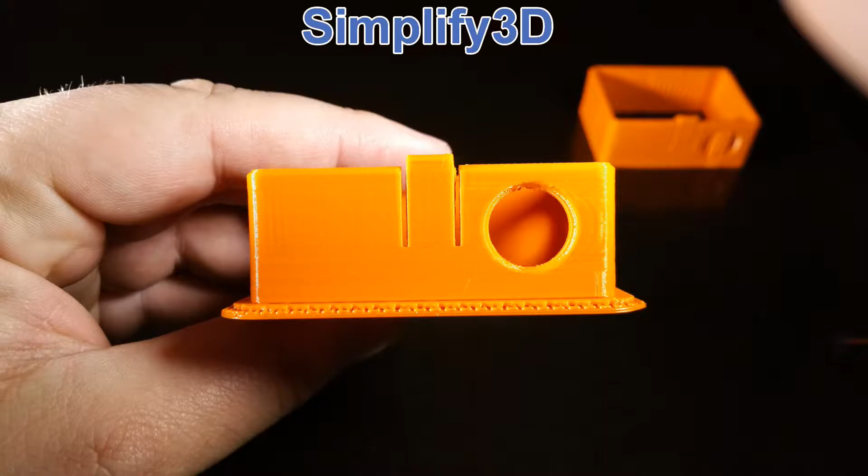The four comparisons we'll be making will be a time-lapse video between both slicers where you can see just how the same model is printed differently between the two. A dimensional quality test where we'll print a 20mm cube and measure in X and Y and see how close dimensionally we are to 20mm. Thirdly, a slicer performance test where we'll take a high polygon model, Yoda, off Thingiverse, slice it with each software, and see how long it takes to slice it. Then in the last test, we'll actually print that model with each slicer's settings and compare the quality differences between each model.

In the end, I feel like Simplify3D is the right software for me as a slicer software for my Makerbot Replicator 2X. You guys may have a different opinion when it's all said and done.

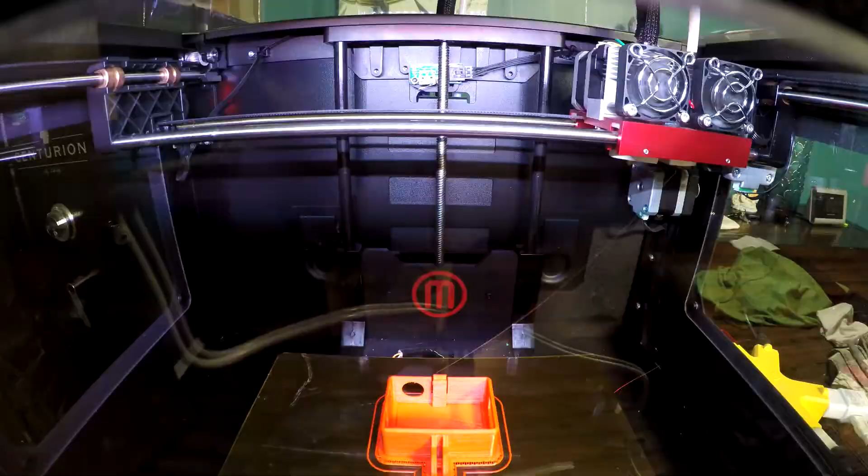Okay guys, this next test will show dimensional accuracy. We printed two 20mm cubes, one sliced with MakerBot Desktop software and one sliced with Simplify3D, both using the same settings as each other: a 5-wall thickness on shell, both with 50% infill, printed at 9mm per second, both with raft. We'll start with the MakerBot Desktop software.

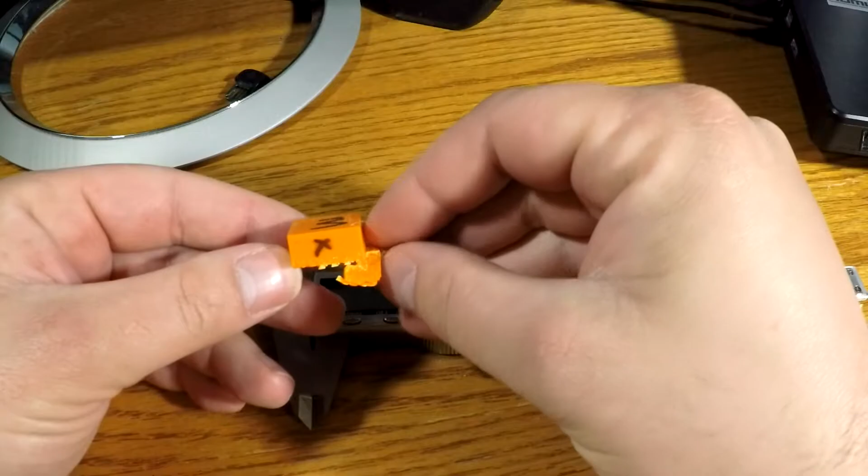Now, I designated an X for the X-axis on the side here. The M I drew was after I pulled it out, and it looks like a 3. It aggravates me because I should have done it a different way, but nevertheless.

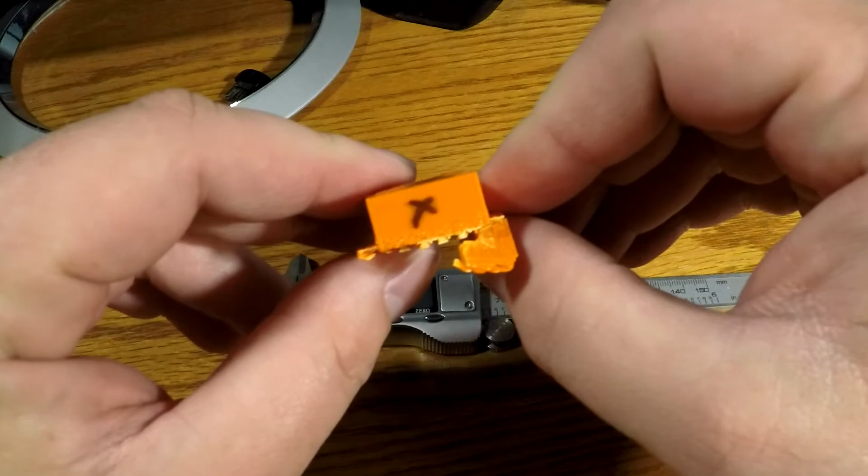Now let's just look at the quality of the print first. So first of all, the layer heights here look really nice. But down here at the bottom, the first say 20% of the print, it's got this rough texture going on that I can't explain why. Anytime I print something flat like this, with flat walls, the first 20% or so has this rough layer. And this is with the MakerBot Desktop software.

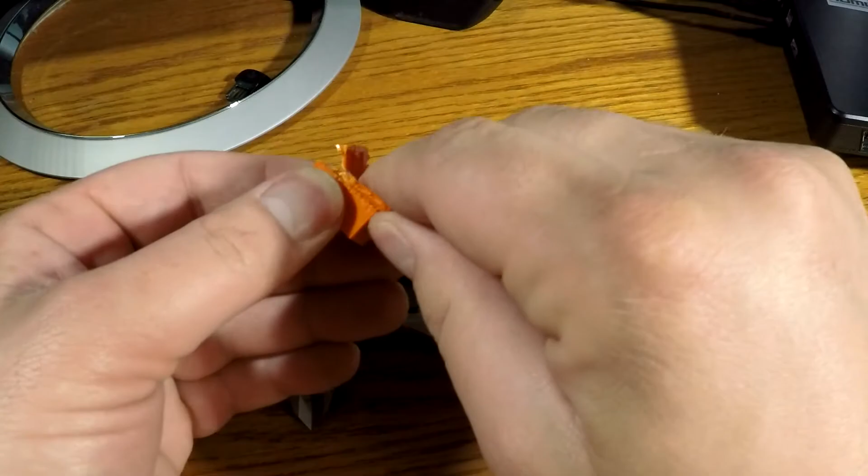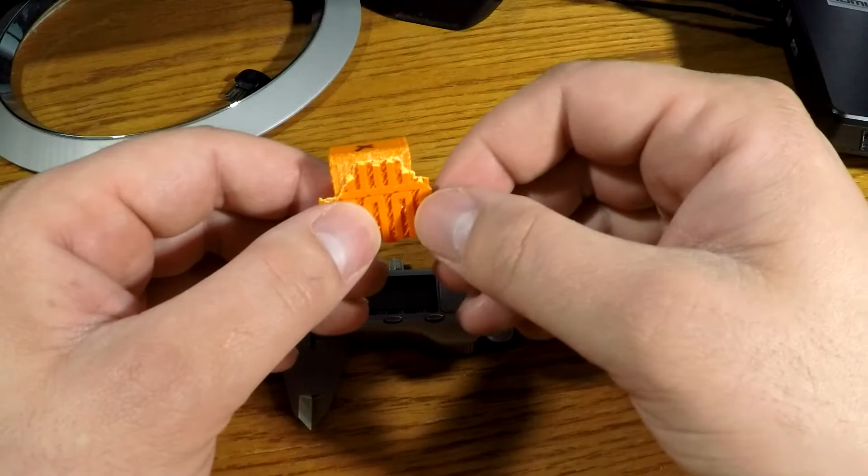Also, you'll notice the raft material is still attached, and the reason being is it's nearly impossible to remove, even though we used the same settings as Simplify3D. Now don't hold this against Makerbot, guys, because each software is going to determine things differently. To make this more effective at removal, I'd have to tweak the settings for this software individually, so don't hold that against it. This is more due to my laziness, not wanting to try to remove it. Again, this video isn't so much about the ability to remove raft material easily, it's about dimensional accuracy. So like I said, this is a 20mm cube.

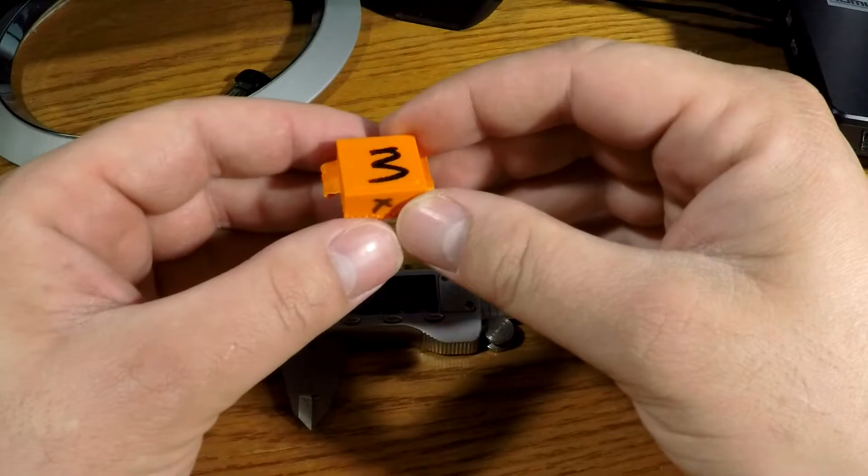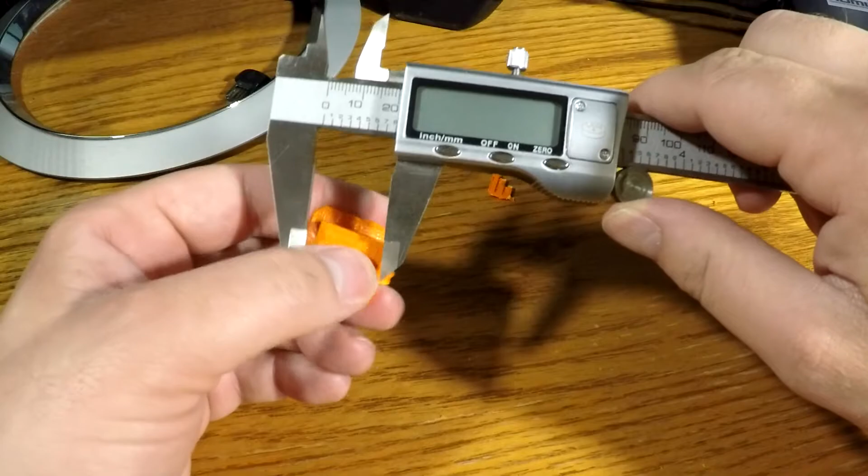Now be patient, my digital calipers were running low on battery, so I may have to hit the reset button several times. But we'll start with the X-axis of the print, and it's not bad, we get 20.02mm. Now we'll go ahead and do the Y-axis. On the Y-axis we get 20.11mm, so 0.11 millimeters over. I say anything 0.05 or less is acceptable, but we are over quite a bit on that one.

So now here's the Simplify3D model. We'll start with the X-axis. I'm sorry, X-axis this way.

Okay, 20.03, 20.02, not bad at all. Let's go to the Y-axis. And we are at 19.95. So it's actually a little smaller than the other model, but this is within what I would consider acceptable, within 0.05 millimeters plus or minus. So this is a pretty dimensionally accurate print.

For me, this is great when you start designing things that fit within each other. Now let's look at the quality of the print. I kind of jumped into measurement right away, got excited about that part, because really it's more about that for me than the surface quality, but both are very important.

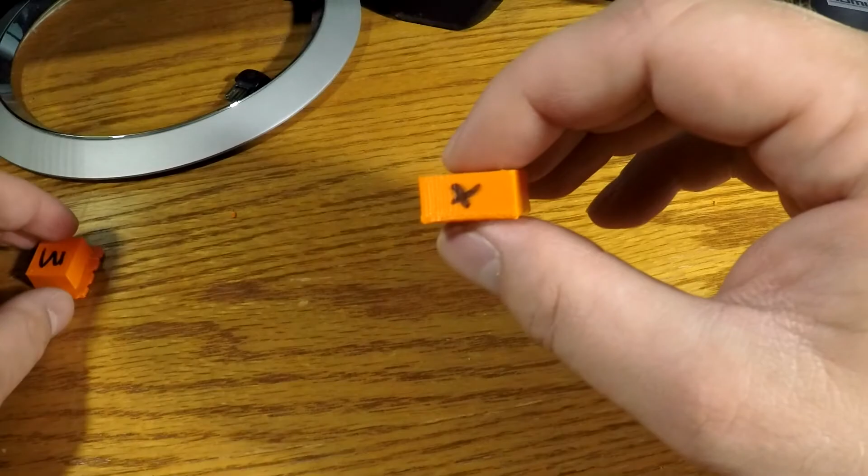So let's look at the surface quality of the print. As you can see, we don't have that rough section that we had on the MakerBot Desktop print. Let me put them side by side so you can compare.

Now the first layers are a little less consistent than the upper layers. I wouldn't say stringy, but they're not as tight together. That could be due to my settings for raft material, and we could tweak that to make it better. But overall, surface finish is better with the Simplify3D model, and the raft material removed fairly easily as well, with a 3-layer base height.

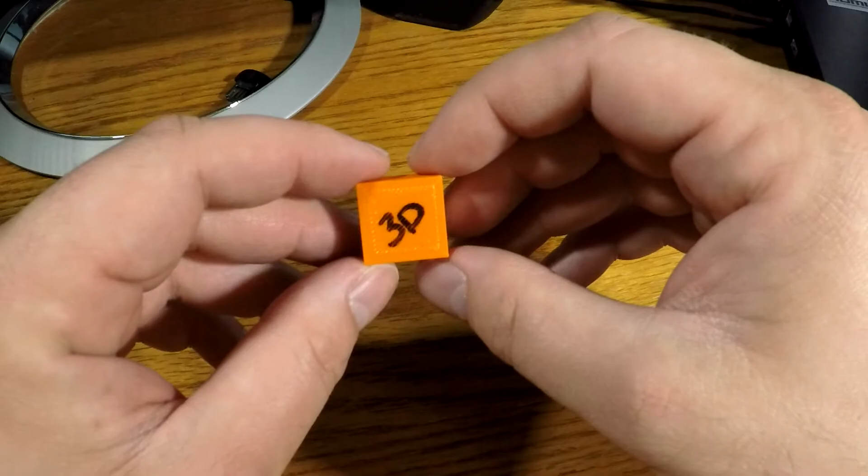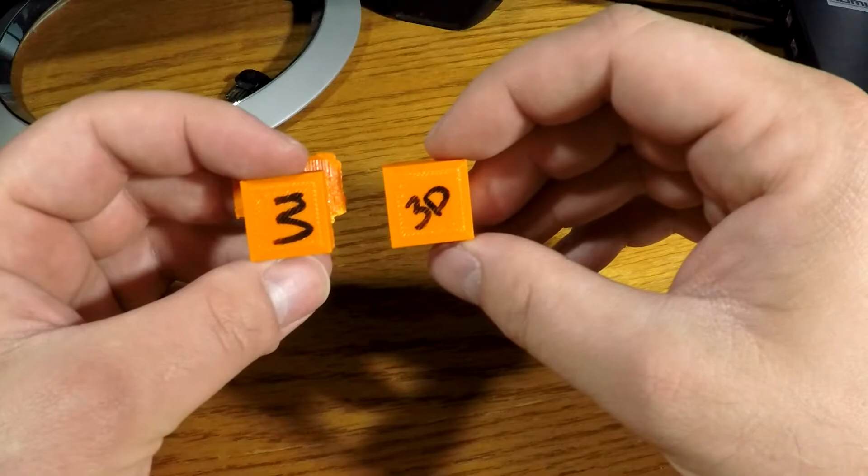So overall, guys, the Simplify3D print gave me a more accurate, dimensionally correct print, and this isn't compensated for in any software for backlash or shrinkage or anything. This is just a raw print, measuring it to see how close we are with each software.

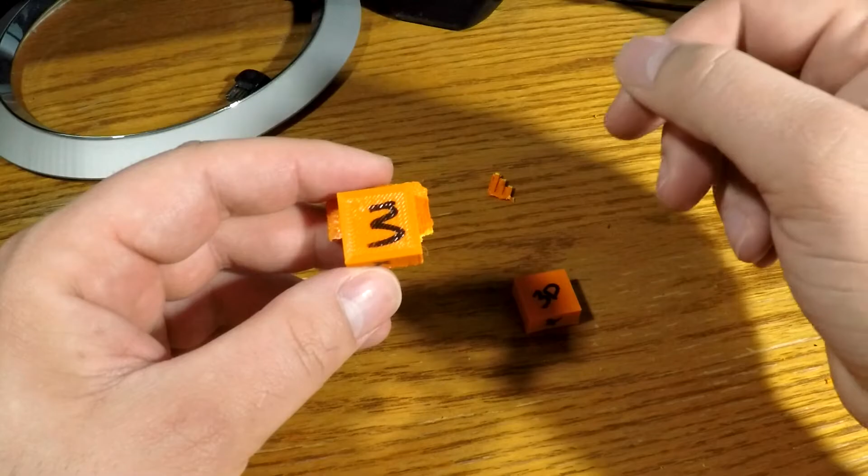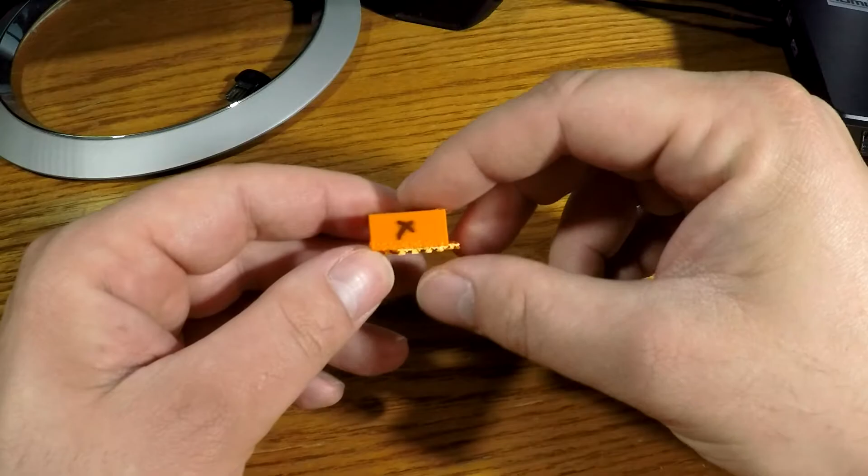Now, with that said, one reason I want to point this out is, as I may have mentioned earlier in the video, where this all started was with a GoPro case. The MakerBot Desktop software GoPro cases did not fit the factory GoPro accessories, and it added material between the parts where they hooked up. Bear with me, I wasn't going to show this right now, but I'll make a little racket.

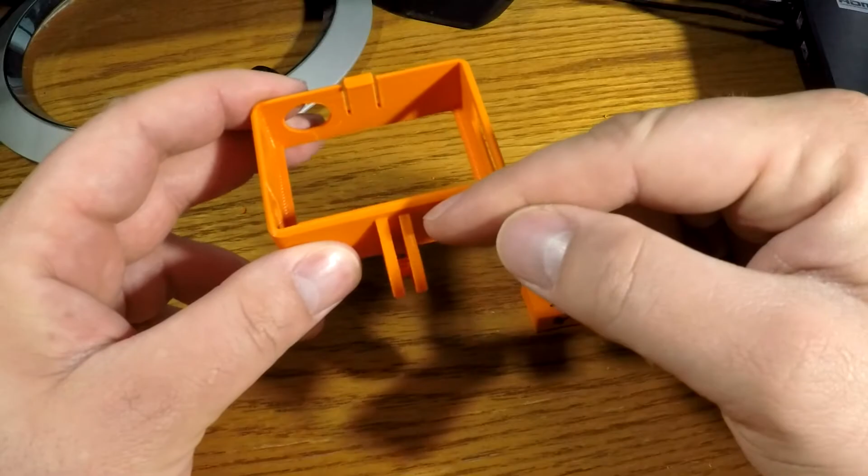I apologize, but this is another case I printed for my GoPro with the Simplify3D software. With the MakerBot Desktop software, it seemed to add material in this area and made these a little thicker, so when you went to slide it onto a GoPro factory accessory, it started making these two prongs split open and crack the plastic. Not sure why that is, but as you see, the quality from Simplify3D carries over into this print. Very happy with what we have here, guys.

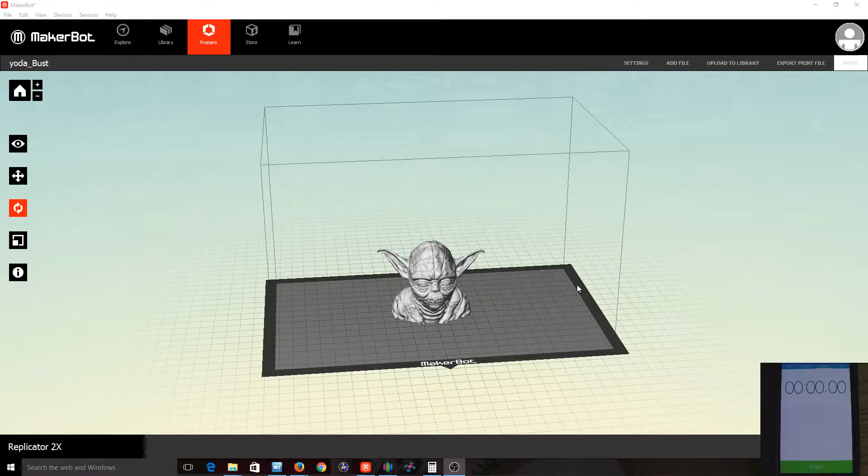Next, we'll look at the performance of the slicer software, slicing Yoda, and then we'll look at the print quality of each model. In this test, we'll show the performance differences between Simplify3D and the MakerBot Desktop software. We'll be printing Yoda, a high polygon 3D model, which will test slicing speed as well as support generation.

As far as settings go, we're using pretty similar settings between both softwares. Extrusion speed will be 90 millimeters per second. Infill will be 15%, and with the MakerBot Desktop software we'll use a hexagonal pattern. Model properties will be a 0.2 millimeter layer height with the number of shells set at 5. We'll be printing rafts with a base number of 3, and support material turned on with a support angle of 45 degrees.

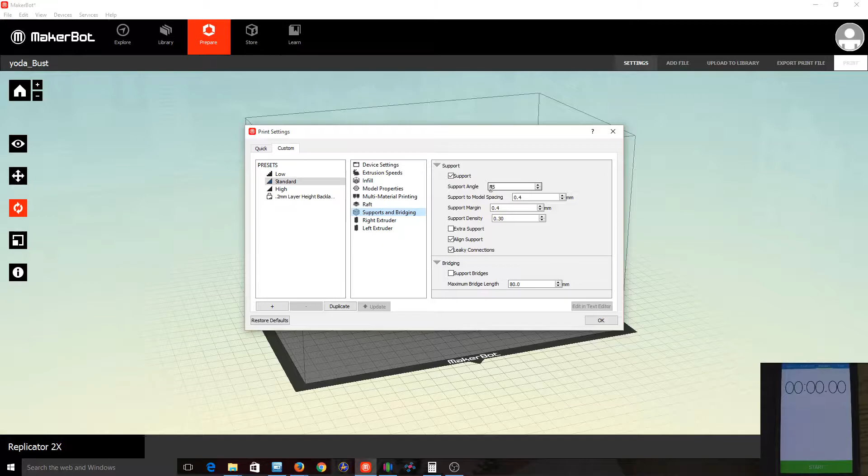Alright guys, here we'll hit the export print file button in the corner, and I'll start the timer on my phone, and we'll see how long it takes for the slicer to slice Yoda and get us to the next step of the process.

Okay guys, so it took about a minute and 1 second to export this file. The information shows the print time will be 4 hours and 8 minutes. The amount of filament used will be 51.37 grams. Resolution, as we talked about earlier, is 0.2 millimeter layer height, with rafts and supports both turned on.

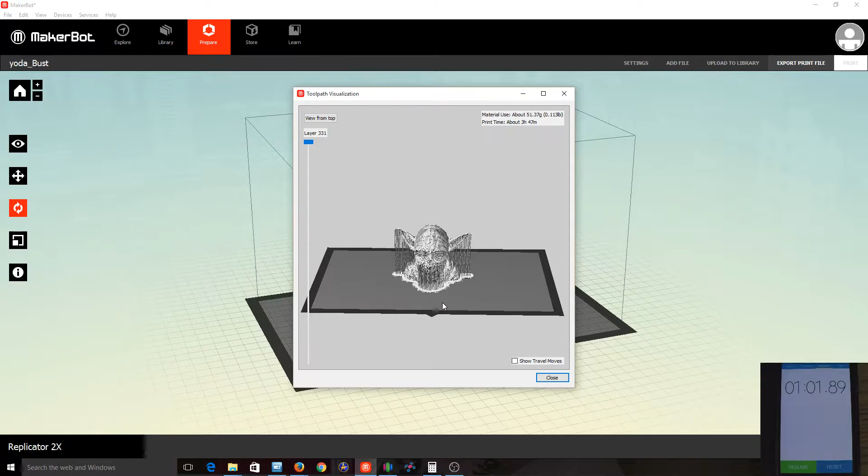You can hit print preview, and at this point you'll see where your support material will be laid. If you want to go down by layer, you can, and you can see the infill material, see when support material will be printed and where, and go all the way down to the raft itself if you wish.

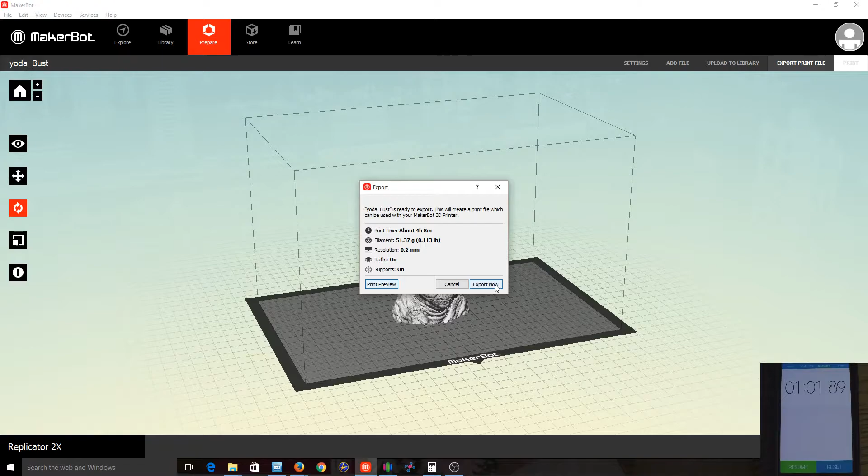Okay guys, now what comes next in the MakerBot Desktop software that is not in Simplify3D is you still have to export it. I'm not sure why they call it export print file here, and then you still have to export it down here. So let's hit export now, and we're going to save the Yoda bust on my computer so I can put it on my SD card and print it later. So we'll hit save, and we'll hit start there.

I'm a little behind. Okay guys, so it took a total of 3 minutes and 13 seconds for the MakerBot Desktop software to process the slicing files for Yoda, that's from beginning to end. Now that doesn't sound like a long time, but when you see what happens with Simplify3D, you'll see the difference.

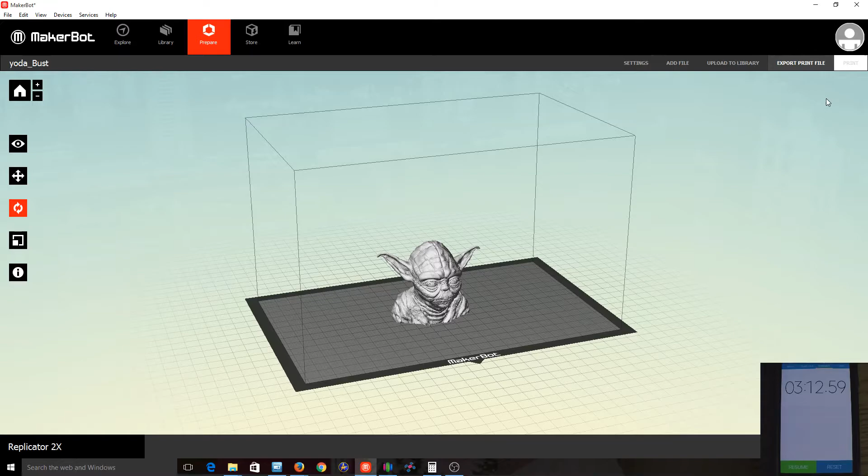Okay, here we are in Simplify3D, where I'm going to show you guys the performance differences and the speed you get out of this slicing software. This software is hands down phenomenal. I like it a lot. It's great. Though it costs you some money, it's worth it in my opinion if you guys be serious about 3D printing. So here we are with Yoda, same model as before.

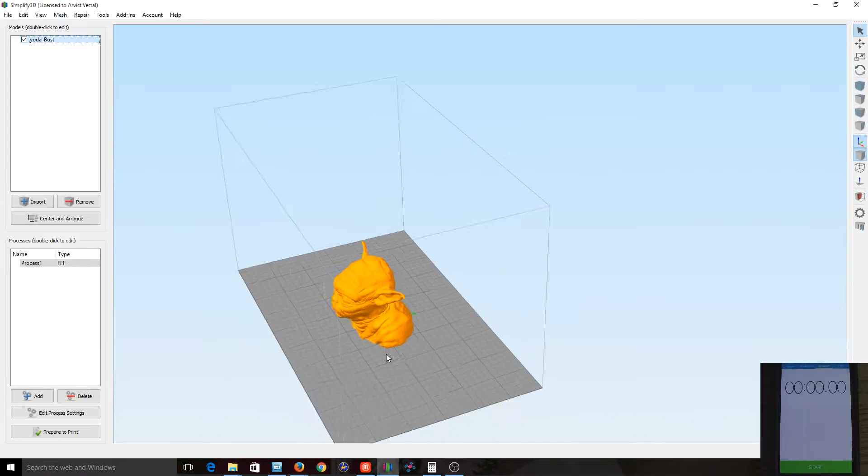As you notice, Yoda looks a lot better in this software. Less jagged, more smooth, more detail. He moves so much easier. Look how fast he moves. Wow, okay, so anyways,

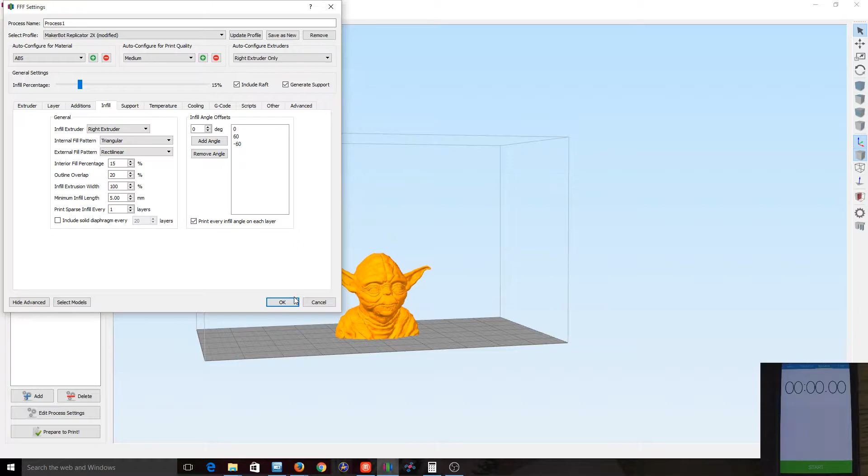let's go to our process, which is our settings. Our layer height is 0.2 millimeters, same as the last. Number of shells is 5. I know it's overkill, guys, but it's my print, so be happy. Infill percentage is 15%, and the infill pattern will be triangular, which is the only difference between the two prints. The MakerBot Desktop print was a hexagonal pattern. The raft material will be exactly the same, 3 layer base height.

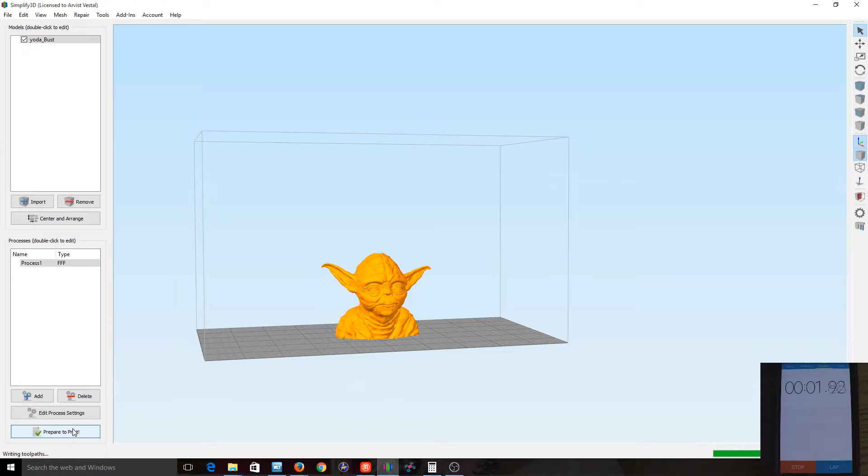We'll hit OK, and I'll come down here and hit the prepare to print button and hit the start button on my phone, and we'll see how fast this software really is in generating a file for Yoda. And go. Alright guys, you saw that. It was that fast, 7 seconds to generate the toolpaths, support material, and everything for Yoda.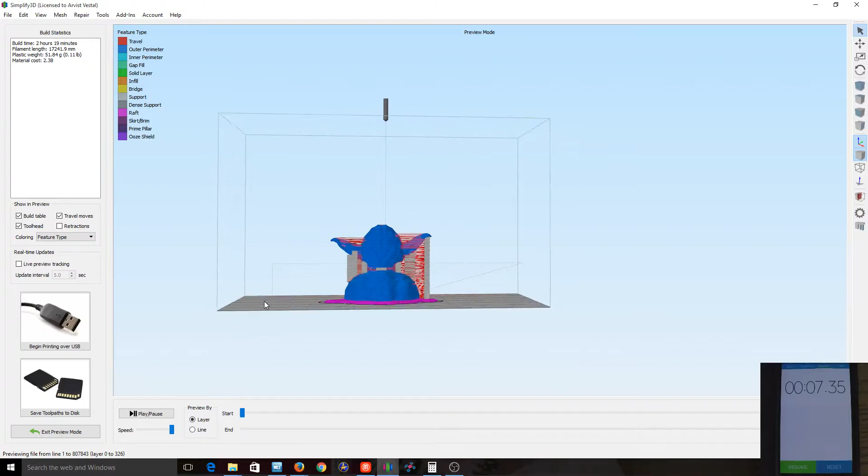So here we are with Yoda. Let's spin Yoda around. Now I'll say this one thing too, guys: Simplify3D has got their business in order when it comes to support material. Their support material cleans and breaks away so easy compared to the Makerbot support material.

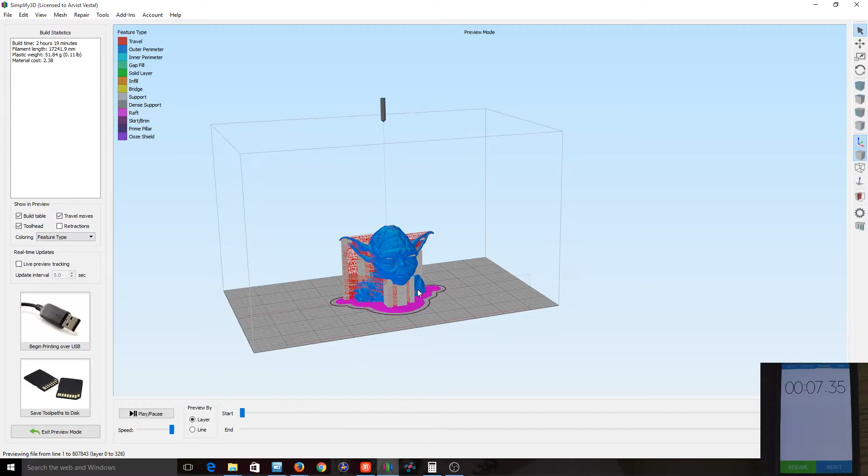Okay, so let's see here. Let's change this to... I'm sorry, we're on feature type. So the gray support material, the blue is the outer perimeter, the pink is the raft, and that darkish, blackish, dark navy blue, purplish line is the brim.

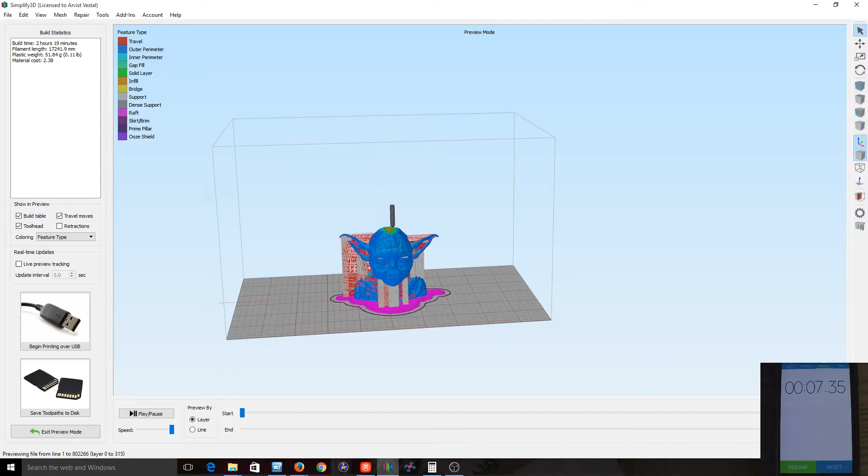So as we see, the print preview is a lot nicer too in Simplify3D than it is in Makerbot Desktop software. And as you go through the layers, you get a lot more detail, as you see the tool head moving around, and you can see the details in the infill. So I like this software a lot, guys.

So more or less you say, okay, now you gotta save your toolpath to a disk. And the answer is yes, or you print over USB, but we're gonna save it to a disk. So I hit the save toolpath to disk button, and literally I hit save, and that's it. We are done, guys. Simplify3D is that fast.

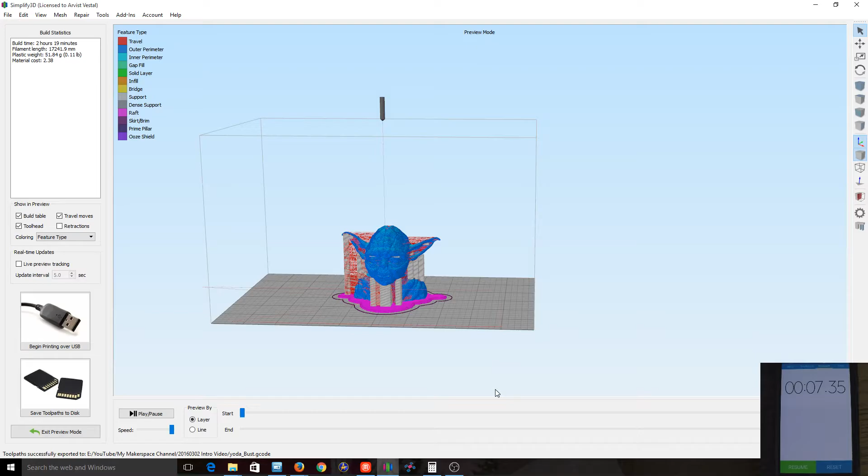So here we are. Simplify3D just did Yoda in 7 seconds, whereas Makerbot Desktop software took over 3 minutes to do the exact same thing. So 3 minutes don't sound like a long time, guys, but when you compare it to 7 seconds, it's a world apart. And hopefully here in a little bit, you guys will see the differences in print quality between Simplify3D and the Makerbot Desktop software with similar settings, with a similar model, on the exact same printer.

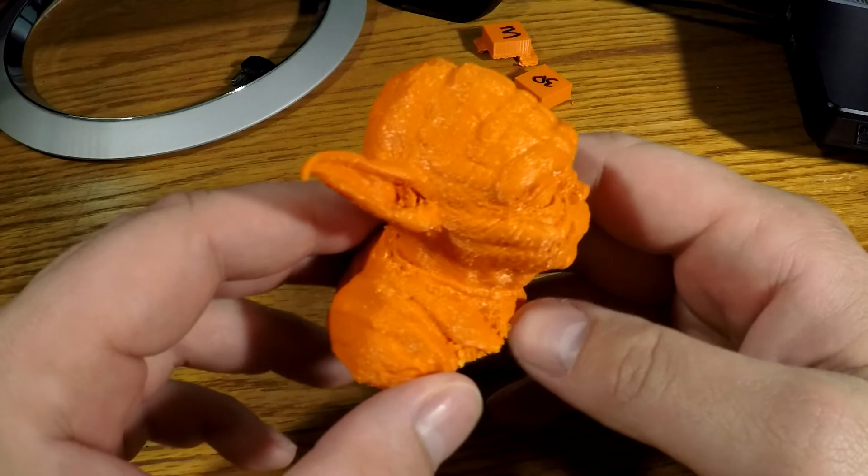Okay guys, let's wrap this up with these last 2 prints. These are the prints of Yoda that came off of the Makerbot software as well as the Simplify3D slicer software. We'll start with the Makerbot Desktop software first. Yoda. Here he is, guys. We'll go over overall quality of the model, and then we'll discuss the support material, and then we'll show you the Simplify3D model, discuss the same things, and then we'll wrap this up.

So as you can see, Yoda came out looking pretty good with the Makerbot Desktop software. I've never had a real big issue printing widgets or little statues, figurines, for that matter.

Overall, the quality is good. It definitely is good. We could have made it a little better, probably with optimization of the software, tweaking some settings and things of that manner. But for the sake of this test, we kept it very general and basic so that you guys can see the differences between the two with just basic settings.

So the first thing I noticed is the roughness of the model. Now a lot of this has to do with the amount of support material that Makerbot Desktop software said was needed for this model to print. It was a lot. He has support material on his neck, inside his eyes, inside his ears, underneath his ears, on both sides. And then on the back side here, it was all inside his neck cavity.

Alright guys, here's the Simplify3D Yoda, printed with the same settings as the Makerbot Desktop software Yoda. Again, this is a 0.2mm layer height. Immediately, one thing you should notice is this guy looks a lot more glossy. It's a lot shinier. It's actually a lot smoother to touch. You look at the detailing around the eyes and the cheekbone where the wrinkling is, and it's more pronounced in this print than it was with the Makerbot Desktop print.

And you notice there's a lot less support material on this print, and that's mainly due to the fact that the support material it printed with the Simplify3D software was a lot better. In fact, the picture I'm going to show you guys will show that some of it's leaning a little sideways. Like I said earlier, I tried to remove this print out of the printer and then take these pictures with better lighting and a better camera, but unfortunately it wouldn't come out without breaking support material off.

But the support material breaks off so clean that underneath his ears on both sides you can't even really tell where it was. Underneath his chin area it's very smooth, very consistent with the rest of the model. Guys, this is a very, very high quality print that we could further optimize, get better detailing, but overall I'm extremely happy.